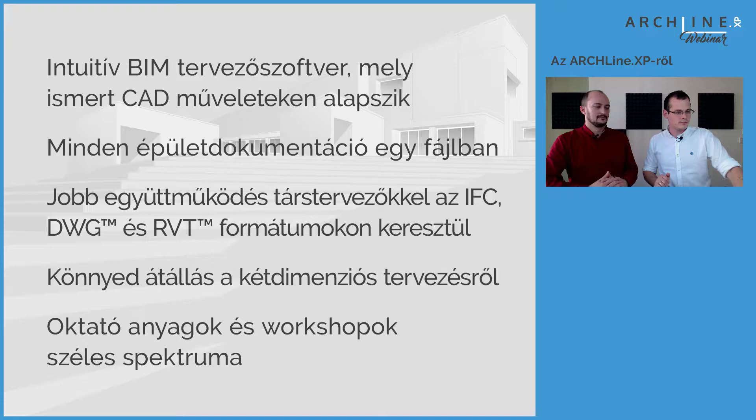Sorry, this is accidentally the Hungarian version. Just give me 1 second to load up the English one. Yeah, it's just a glitch.

Until then, please tell us what we are going to keep on discussing this week. So about this model that we will use, we are very thankful for the designer, and internal parts, roofs, and the flat roof itself, and the structure inside. So this is what we will create today. Perfect, this is what we will start with today.

Yes, meanwhile I have the slides ready. So ARCHLine is actually a BIM design software which is based on CAD tools that you know and already love. It's targeted for 3 main areas: architecture, interior design, and furniture manufacture. Obviously now we are going to focus mostly on architectural tools. This means that everything you would need during a design is in one package. So all the things we are going to discuss today come under the one umbrella of ARCHLine.XP.

And what we are going to show during these discussions is how you can not only create your own design, but how you can collaborate with others using the benefits of BIM. Now, when we talk about BIM, this is a pretty new area, but we are going to talk about that too. What are the file formats, what IFC is, what it does compared to other file formats, and we'll cover all these kinds of details.

Let us give you a teaser of what we are hoping to achieve. Here are a few slides of the renders we are hoping to create by the end of our sessions. As you know, ARCHLine is targeted for creating design and building models, and eventually you can create visuals and rendered images from the software. You can either use the built-in renderer we have, or use a third-party solution.

A couple of thoughts on this. Well, there are other solutions that we will show you at the stage when we talk about visual design, and there will be a pretty exciting one which allows you, if you have a powerful GPU, to utilize the power you have inside. But what we will first focus on is what is inside the package, and that is a built-in renderer with all sorts of material settings, integrated into the project. So whatever you create is in one single file. Even the visuals you can put into that file, and then later, for example a year later, you can just load that up and continue where you left off.

So let's see what we have on the topic today.

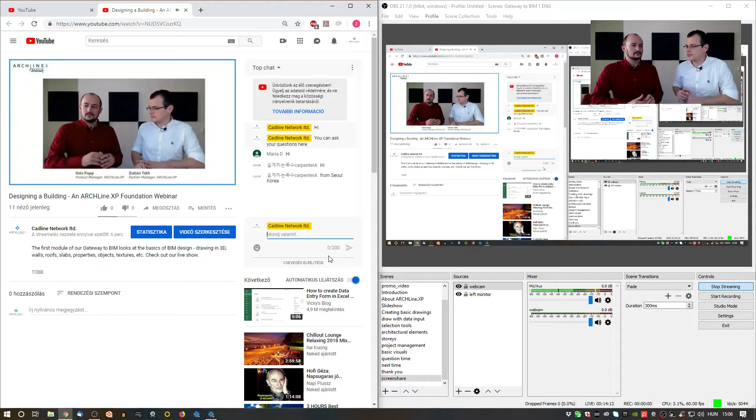Sorry, this is something we have to amend, just give me a second. You just have to share the screen. Okay, let's see how that can be done. Yes, sorry, there's a glitch we have to fight, but that's the charm of the live shows we are doing. A couple of seconds ago you saw how we are broadcasting the show, but that's another topic. So now we are going to talk about... Actually, we have another webinar on that too.

Yeah, so now let's talk about the building itself. As I understand, this is from one of our users. This project was designed a few years back, and it's still an up-to-date model. As you can see, it's finely detailed. I mean, this is still conceptual, but it already features many details that will lead to the end version, which you can see on the right-hand side: the sections, the elevations, the 2D floor plan, and the 3D visuals themselves.

So let's start first with how we can create a floor plan. I will use this as a guide. I have a printed plan, but you don't need to have that - it's just that I don't remember the numbers very well, so I will sometimes look at this paper. But first we will start with the method of how you can draft, how you can create the drawing literally from scratch, from nothing. For that, I will start working with a new project.

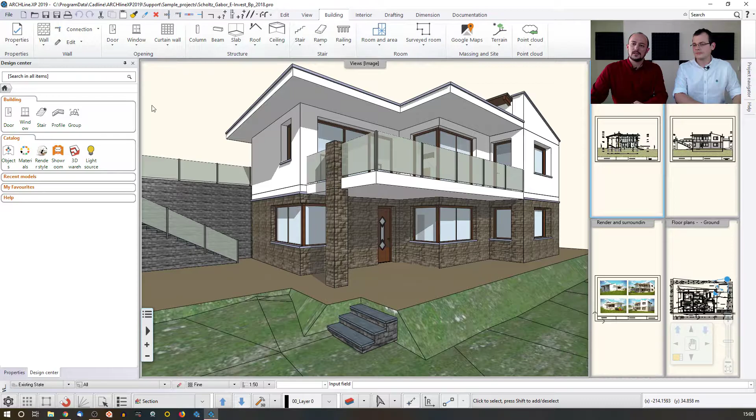I will just go to new project. This is what you will see when you start up ARCHLine, and you can either select any of the recent projects, or click here to switch between the icon list, icon preview, thumbnail view, and list view. In the list view, you can actually filter the content. You can see the history back for a very long time of the files you loaded, with locations, file names, and so on. So if you'd like to find something, like a model we used last time called the Elata Nova project, it filters to that. You can filter by name, and obviously use the date filter to find the most recent version of the project.

You can actually organize this content by default. I believe it's organized like it's on your screen, by date, but you can organize by size, path, and name - it's really up to you how you'd like to represent this list. Actually, the icon thumbnail view always represents the projects one by one with a little preview, in time order, so the top one is the latest, and if we scroll back we can see earlier projects we've worked on.

So now, talking about this, I'm not willing to open up a recent project, so I will click on new project, and when I do that, ARCHLine.XP automatically prepares a project in the default folder, which is under your documents, ARCHLine.XP draw folder. You can actually save anywhere else on your hard disk, and work with a file located anywhere else, but this is the default path. What is a project?

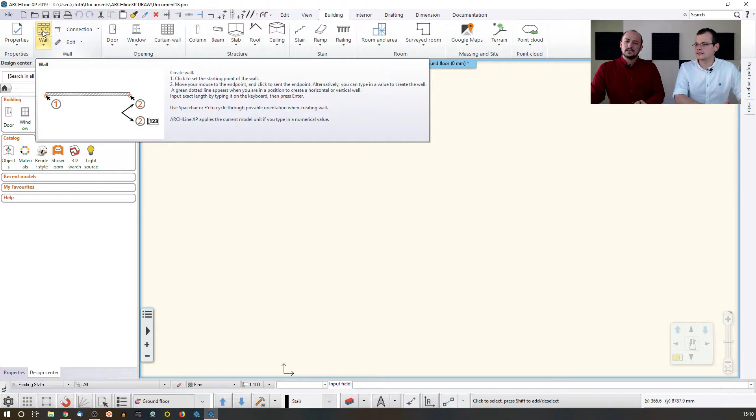So how do we get started? Let's start with the wall tool. Whenever you create anything in ARCHLine, you just find a command, click on it, and the command starts. Sometimes a little menu appears, giving you many other options and tools, but many times it's enough to just click on the main tool to initiate the command.

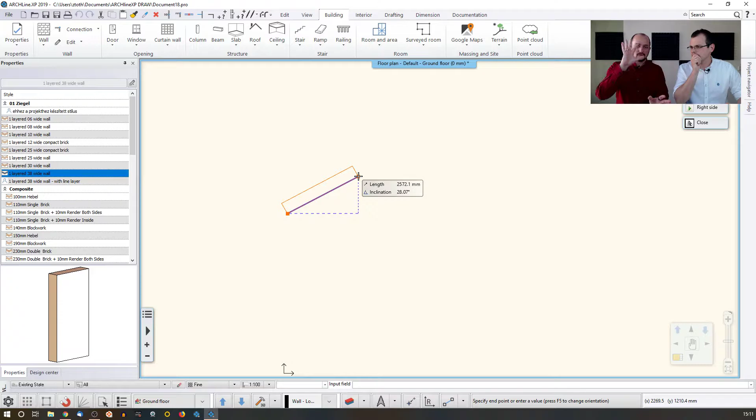When I would like to create a wall, it's a very simple task. You just click once and release the mouse button. You don't click and drag. You click once, move your mouse to the desired direction, and either click now to create the wall itself, or move the mouse, release it, and type a value. Right now I'm actually working in millimeters.

You can see the units at the right bottom corner. So when I move the mouse, type 1500, and hit enter, I will create a vertical wall which is 1500 millimeters long. As you can see, whenever you create something in ARCHLine, it appears automatically in the 2D and in the 3D in parallel. You can also switch between full screen mode and the regular windowed mode.

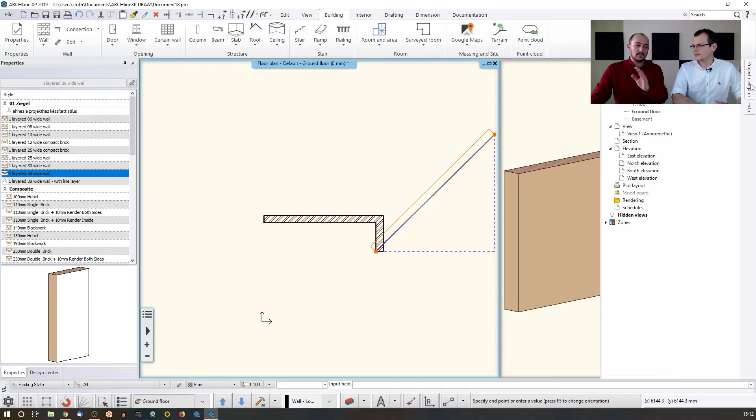There is also a project navigator. By default it's off, but you can turn it back on, snapping it to the right side of the screen. That way you can navigate the software, changing floors, drawings, and so on. I will use the default layout of ARCHLine for now, and sometimes we will get back to this point when it becomes necessary. So this is basically how you work with that.

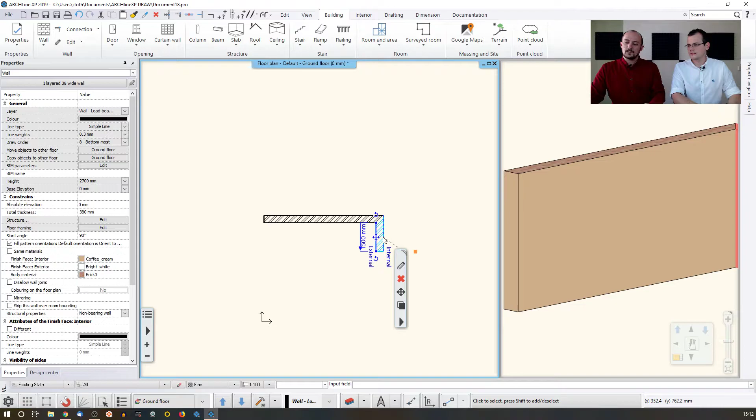Whenever you would like to skip a command, as you can see it's running continuously—most commands do. So if you would like to terminate it, saying this isn't something you want to continue with, just hit escape and start another tool. Whenever you would like to select something, just click on it. If you'd like to select something else, click on that as well. If you'd like to select multiple items, click and drag a selection rectangle, and then, for example, you can erase that. So this is basically how you work.

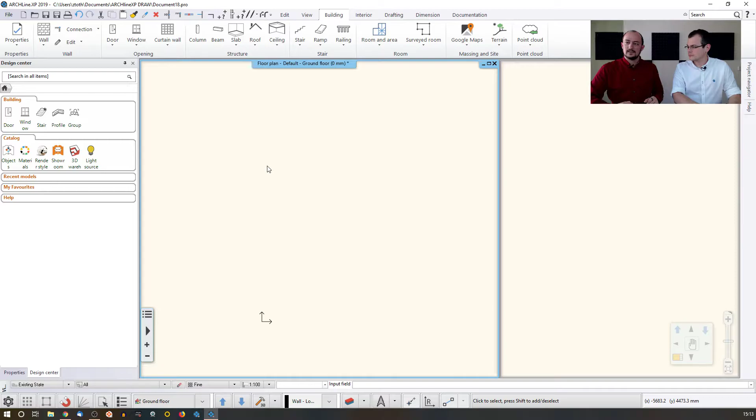Now I'm willing to draft something that will be the initial phase of our drawing. So first I will draft, knowing all these things I've just talked about. I will create the outer contour, the main walls of this building. It's worth noting that I'll work with the default settings for now, but later on we'll realize we'd like a different setting, so we will teach you how to change the settings. For now, we just pick the wall and start drawing.

So I click here, and just as before, I click down and say I would like to create this wall with its external length. So what you are doing now is typing in the exact value. Instead of working with a visual control, you are typing in the exact value. One interesting thing to observe is that whenever you are working with something, you see a bluish line, which is actually the reference line. That's the line you are measuring and positioning, and the wall is added in relation to that line. We'll show later on how to toggle that.

What happens here is that as you proceed, you see green dotted lines, for example, which help you snap to an orthogonal direction.

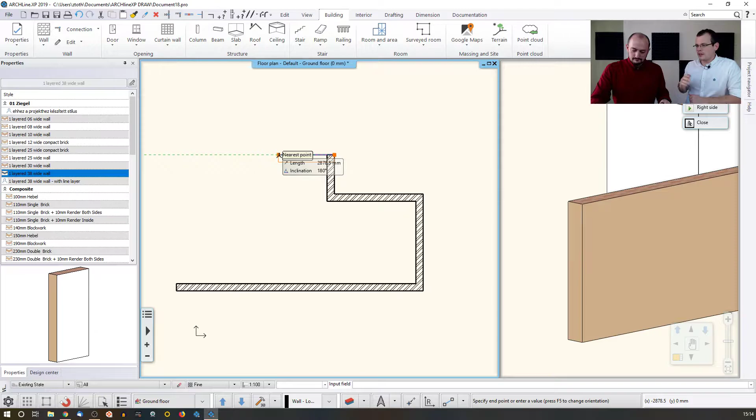Because now we are working in that, we are not working with any slanted directions. We are just going up and sideways.

Now this is an interesting point, because now you could be adding the value, or you can just snap to the bottom left wall corner. And this is where an important question comes up: if I move my mouse to this point, I can snap to this point, but how can I snap to this actually non-existing point?

There are two ways. One of the simplest, depending on how you think of it, is if you move your mouse to the corner point and keep the mouse over there, and then remove it, these green lines appear. These are the guidelines which you can snap to, so it's very easy to find the intersection.

And then there is another way. If I would like to create something with this length, I could still use the same method, or I can just keep holding the shift key, and see, whenever I move my mouse, I'm not clicking - I'm locking the direction so I'm not able to distort it, and then I can also refer to this other point.

So both work. Now I'm just quickly creating something - I see that there's this extra part, an extruding little niche bay in this wall. So how do you add that? Would you draw it as a separate entity, or would you break this wall up into pieces? There are many different ways - I could break this up.

I could also draw it like when I saw it, but this time I simply forgot about it - it's okay. I could erase that and restart it, but there is a neat tool to do that.

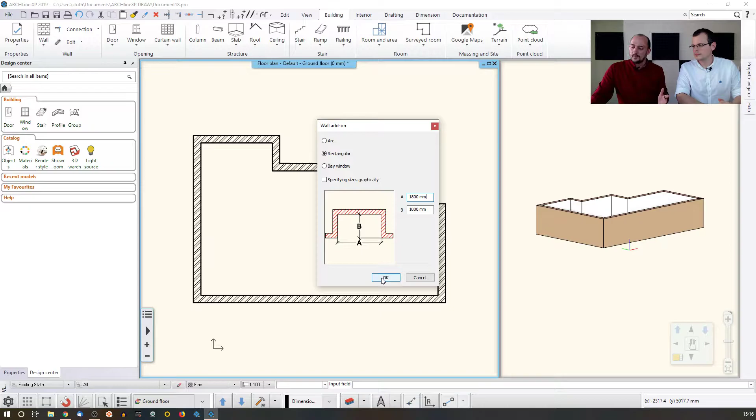So let's say, okay, I'm happy with that. And whenever you see this exclamation mark marker, this usually means that whatever you would like to do now just does not make sense in this specific context. You cannot place this out into thin air, but you can snap it to an existing wall - it cannot stand on its own, you cannot see this happening anyhow else.

Now I know that this little orange corner point that I can see on the screen is exactly 2,300 millimeters from the corner. So instead of trying to find that value, I would not recommend doing that - you just move your mouse to the position wherever you wish, and then you just start typing. Each and every time you would like to use a specific value that you would like to determine, type it always, because that will result in the outcome you would like to create.

So this is how you do that. And this command just keeps running until you say escape, and then we can go on and start working with the details inside.

I see some partition walls here, with various sizes and various thicknesses. Okay, so let's focus a little bit on the details, on how you can set up settings.

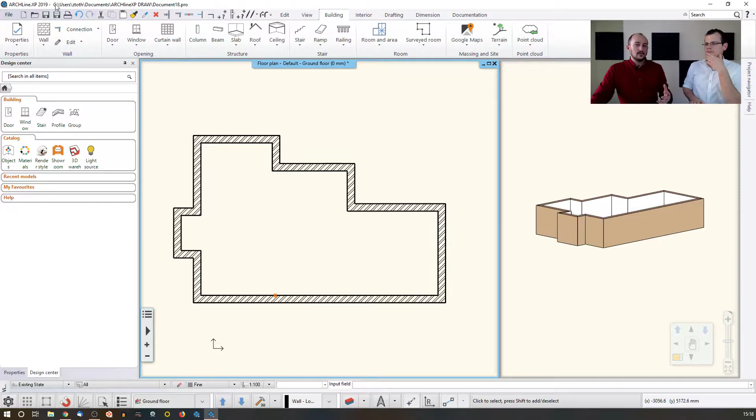Now, just as I mentioned, whenever you work with something, you can work with tiles - some software calls them templates or presets, ARCHLine calls them styles. So if you click on wall, you can see the style list here at the left-hand side. As you can see, the ARCHLine software is shipped with built-in localized content. Now we work with the international English version, but your country's details might be a little bit different, so you will see a similar list to this.

Whatever I select here, now I know that I would like to create a 300 millimeter thick wall. So I just click on this one. It's actually in centimeters, so I click here. And then when I click on the corner point from where I would like to start drafting, then I just use it.

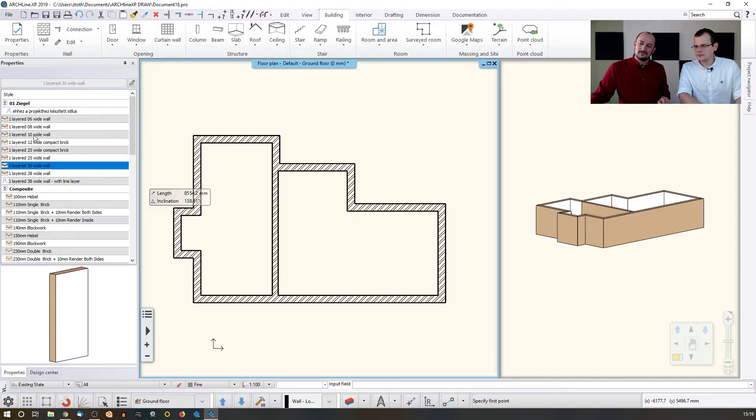There is only this wall here, and then there is another one which should be 100 millimeters wide. So I click here and I start drafting. There is one here, and there is another one here.

And see, now there is a problem with the blue line. Now the blue line, in correspondence with the origin or with the orange part, it should be flipped over. So how to do that?

You can actually go to the right-hand side. There are options appearing. Most of the commands supporting options, those options will always appear at the right-hand side. They are optional, so you don't have to use them, but in case you need them, they are there. So in this case, I just click on the right side, see it's flipped over. I can click on the left side, then it's flipped back, and there is also the center, the middle. So this way you can want it on the other side. I'm clicking on the right side, and then I just click here, and then I just keep drafting.

Now, I don't necessarily need to always work with values. If I just know the shape that I'm about to create, and later I would like to fix the size, that's also fine. So I will focus on this now.

I just know that the shape will be something like this, and there is, again, a wall somewhere here around until this point. Again, using this green, I'm just snapping lines. And then I know that there are 2 walls. I actually know the values, but it's fine to fix that later.

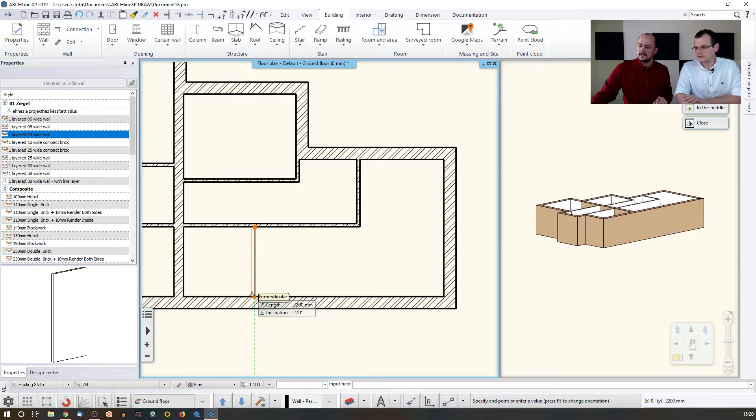So I just simply rough them out, and then now I will show you how to change the relation between the items later on. This is actually something to do with the selection.

Just as I mentioned, when you would like to select something, you just click on that item. If you would like to select something else, you click on that as well. If you select an item and then keep holding the shift key, and then click on another item, this leads to multi-selection, which is different from the rectangular selection, because in that case I'd likely select other walls. This way you can pick specific items one by one, and all of them become the selection.

And the same way you can go back. So now I know that the distance between these 2 walls is exactly 1100, and then I just type it and it fixes that. See, it of course keeps the connections, and the same way I can just fix this here.

So let's just move this. This will be, I believe, 2350, and there's another one here, and this is actually 2100. And so on, keep going. This is how you can later refresh or update the content.

Wherever you move the items, as long as they are not in a geometrically impossible situation, they will be kept in connection, as you can see on the screen.

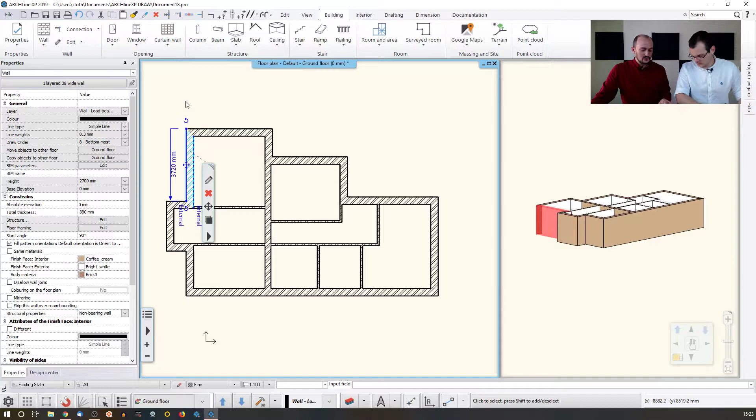For example, I know that this wall is not correct now, because I just realized that I started working with 380 wide millimeter walls, but actually what I'm willing to create is 440 in thickness. So how to do that?

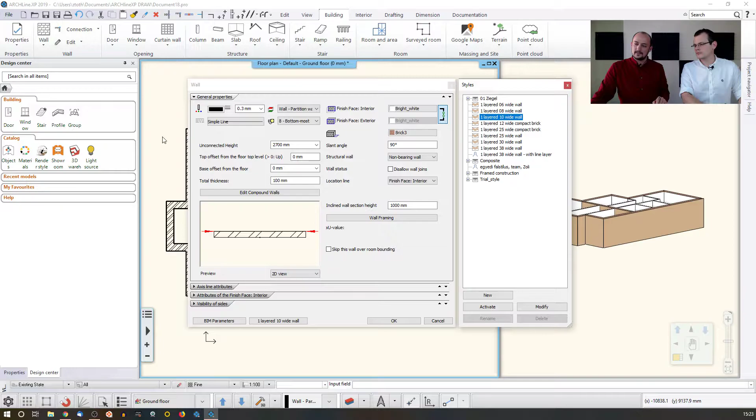Let's go back to the settings, wall and wall settings. Let's use this as an initial setting, because otherwise it's okay. The material, the height is fine, so I just use that. I load up the styles list from within the dialog, and I double click on this wall, and it loads the settings, and then I can change them to wherever I want. I mean, this should be the setting.

You can even set up the layer settings, priority order, and so on. So let's say I'm fine with that, and even without saving it into a style, it's very important to know you don't have to save them into a style. You can just click OK and start working with it. Let me just show you that. If you just click there, now I'm working with a thicker wall.

But to be able to go back, let's just find this one. To be able to save it, you just need to click here, and say that, okay, this is a new style, and this style will be, again, simple 440 millimeter wide load bearing, and so on.

So you can keep the name according to your standards. You can set up a folder, as you can see. This is a composite folder. There's a framed construction folder, and so on. You can even create a subfolder, and decide what happens with this style.

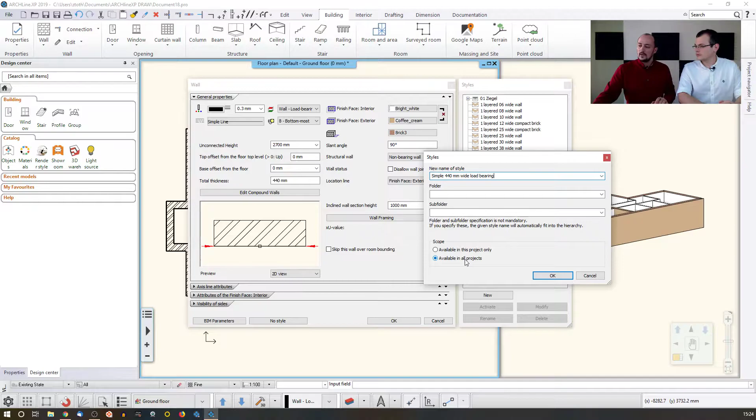Now, a style, when you create it, can be visible all through other projects on this computer, or you can make it private to this one. So this is the project only setting. I will keep it as a public style for all the projects, so I will just go with the default. Let's just go with okay, now I can see the name appearing here. So from now on, whenever I create a new wall, I will create that wall with that specific setting.

Now that's fine, but I actually would like to change this existing wall into the latest created settings. So for that, I can actually select these items. Is there an easier way? Yeah, select all actually. There is a much better way instead of just simply going through and selecting them one by one.

There is a selection tool which is actually appearing in two places in the software. One is at the bottom. You can click here, and you can see there is a by properties option. By properties allows you to select a criteria, like in this case, this will be the wall width, and if the wall width equals to a specific value that I determine here, I think it should be 380. Sorry, yeah, that's right, you're right.

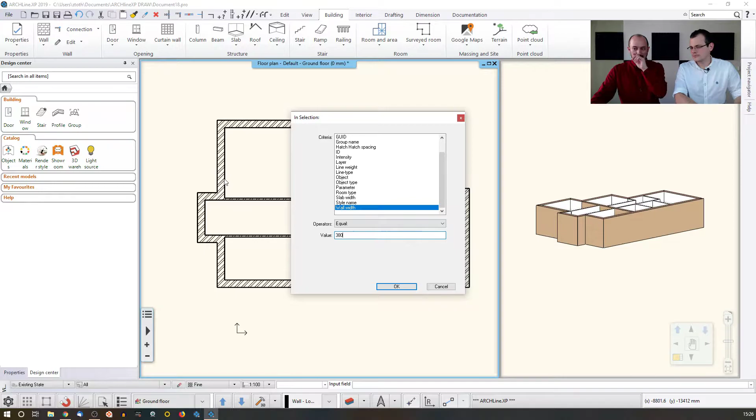Because that's what I'm willing to do, and now I only have these, so I just select this and click OK. So now the software selects all walls with the same thickness, and then now I can just click here, select the correct style, which is simple 440 millimeter. So now it makes changes, and in some places, as you can see, I might need to fine tweak what happens here, like just move this item with the movement marker, move from this point to this point. That's how you can override the settings in the project that you're working on.

How about other editing tools? For example, if I want to add a slab to this. Yeah, how do I do that? First things first, let's see how you can handle the content.

Now, as you could see, I'm zooming in by scrolling up. I will zoom out by scrolling down. Each and every time when I zoom in, the focus, the center of zoom, is where I keep my mouse, so I'm not just holding it here. This is how you can fine tune whatever you zoom. You can actually keep holding the mouse wheel and moving the mouse. This is panning, and this works all around, in the 3D and in the 2D, and zoom in and out works the same way.

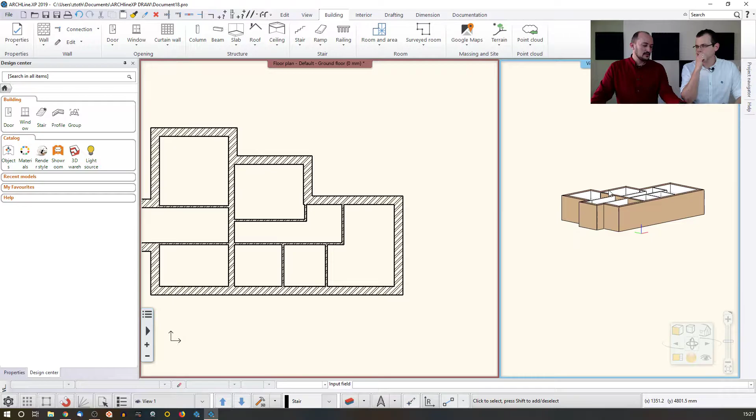Now the difference here is that in the 3D you can actually rotate the model, you can orbit around the model, and this can be done by just simply holding down the shift key and the mouse wheel and then rotating. So this way, now we can actually clearly see that we don't have any supporting slab or ceiling or anything like that.

So I will just quickly create that. I go back here and use the slab tool. The slab tool comes with the default setting that we currently have, and then I can start deciding whatever I would like to use.

The slab in sketch mode is something we will use later today. So I will go with the slab by walls. This is the simplest, because I only need to select the whole building, hit enter, and the software will recognize its outer contour and automatically create a slab like this. Good, I think we don't have any openings yet.

So how do we add them? Well, let's start with the doors. They work in a similar fashion. When you open the door or window dialog, you will see built-in settings - you can go with a flush door, a double glass door, or any of these, or you can go with the library settings using this command, and then place it.

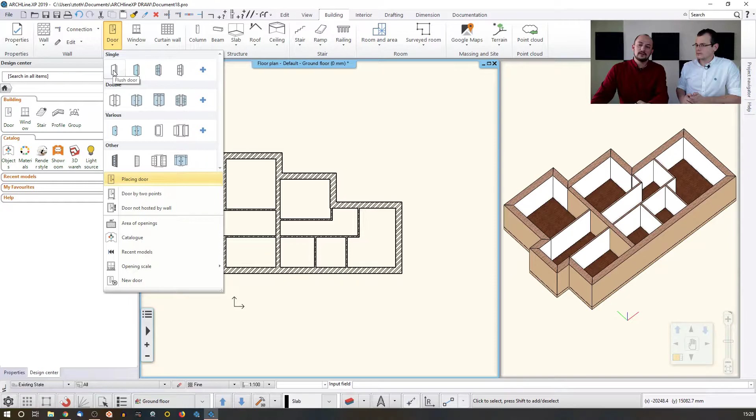So I'll go with a single flush door, and I'll show you how it generally works. Whenever you see this exclamation mark, it means you cannot just put this door freely. There's actually a specific tool for that if you want. But normally this should be part of a wall, so it only works when you're hovering your mouse over a wall.

So you can click here, set up the opening direction, then click on another place, and as you can see, on the left-hand side there are predefined styles which you can extend with your own settings. So now I will work with the 900 millimeter wide door in a partition wall.

As you can see, there is this orange dot now on the screen. It appears on the right-hand side of this door, and this means this is the reference point.

The same way I could set up the distance of this reference point from the same-side corner point - I could just type 1500 and hit enter, and now the software places it. How do you move the reference point to another point?

Let's say I would like to place this door with its own center point into the center, the half division point, of this wall. I can easily find the half division point, but the problem is it will place the left side. So if I'd like to change the reference point, I use the right-hand side options - next reference point - hover my mouse back, and I can see the orange symbol is grabbed with its center, then align that and select it.

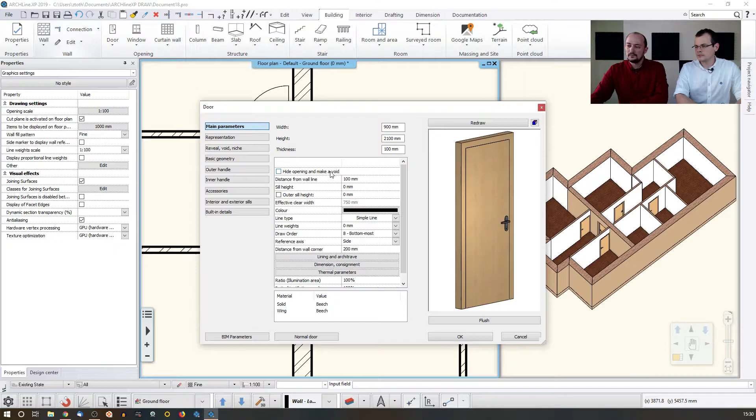If you would like to find a hole, you will find built-in holes that you can use as doors or windows. But if you would like to turn an existing one into an opening, you just select that and go to the properties, and in the properties dialog you will find 'hide opening and make a void'. This is literally turning it into a cut in the wall.

And okay, now I have this opening. How do you modify the size, as you can see? It should be a bit wider, I think.

Anytime you select a door, you just click on its symbol and it's selected. Now in case of a hole, it's a bit more tricky because you need to click on its side, since there's nothing to click here. So you just click here, and the software either finds it automatically or finds something else at the same click point - and yes, at this point there is the wall as well.

So if that happens, and as your project grows in detail, this will happen from time to time. You will be able to select that specific item, and the software will automatically create the jump list.

Now let's talk about these markers. They mark the situation, the value, the corner point, or something that appears right away here. For example, here you can see the height and the width, and you can see whether it's the left or right hand side of this door. Also, if you click on the corner point, you can see the change size option.

You can just resize it. Click on the new position. And again, if I wanted to, I could just type a value as well. So this way you can make it larger.

And let's just make a few windows, because what are the particularities of adding a window? How are they different? Well, one of the differences is that they likely have a parapet or a sill height, as you can see here, and sometimes they are not just freestanding windows anywhere in the center.

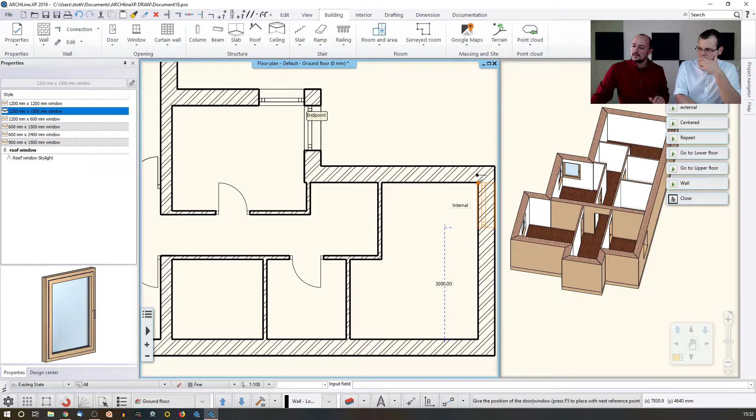I can use the next reference point tool and just click on the center point and so on. So this way is rather similar to the previous solution, but there is one specialty, I believe, to these, and those are the corner windows.

Sometimes you would like to create a corner window, something similar to what you can see here, but without the wall here. I just would like to see the windows touching each other with the column, perhaps making them join together. So there is a tool here called window.

It's actually here, I cannot see it with my eyes. It's the join two openings on wall corner tool. So you need to select one of them and the other one, and then it's joining.

And if you start the same tool in 2D, it works actually the same way. So you just go here, and now the windows actually retain their sizes. You can decide you want to do it some other way, but this is one way to do it. Actually, we did a webinar on doors and windows a few weeks ago that would show you the essentials.

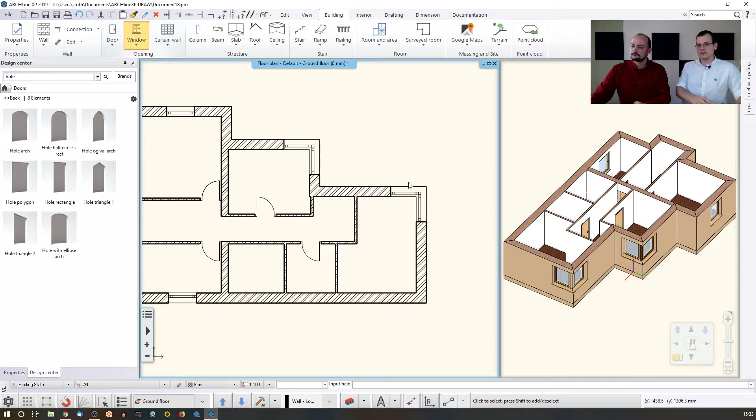One thing I just want to add here is how these doors and windows are getting into the software, so what are the sources? Just to mention a few: there is the built-in library, of course, which you can fine tweak.

You can go into the details of any of the doors and windows, and you will find this basic geometry page, and here you can just tweak them. You can also use the new door, new window command to literally create something. We have this topic of how you can turn an object into a door and window and use them.

Download from bimobject.com, Google 3D Warehouse, and use it as an asset for a door or a window. Use whichever source is best for you.

How do we turn this into a multi-level, multi-story building? Well, before I do that, there was one thing I wanted to show you about the slab. If you click on the slab, as you can see, there is a bunch of lines and dots appearing. These are also markers.

With those, you can actually literally stretch the content at any time. What I did here, I click here and select offset, which is parallel shifting. I click here and then I click here. I just remove this node, like a pin. So now it's merged, the two edges, and then I can just move this here and further extend it.

So you can flexibly edit all items in ARCHLine. So this is what happened. Now let's talk about the floor and the level management system.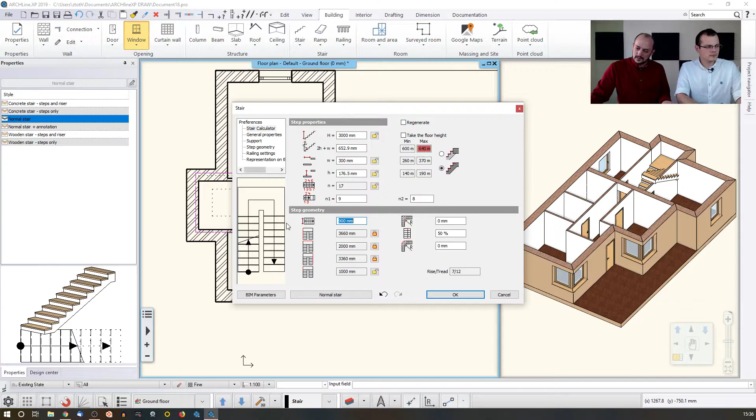If I would like to keep it, it's fine, but actually I would like to change the whole width of this whole staircase, from here to here. There's a little figure here showing this is locked, and that's why I cannot just change this value. If I unlock this value, then I can type the correct value, and again wait a little bit, and I can see it appears correctly. So I click OK, and then I have this here.

Another thing you will likely want to create for a staircase is a railing. There are many ways to create a railing, but for a staircase it's simplest to go to the railing settings and select on which side you would like to place it. If you walk up the stair, it's on the right-hand side, so I just click here, and then I select any of these styles the software ships with, or which I created. There are a few appearing here, so let me just go with this one. With this one, when I click OK, the software automatically drafts that for me.

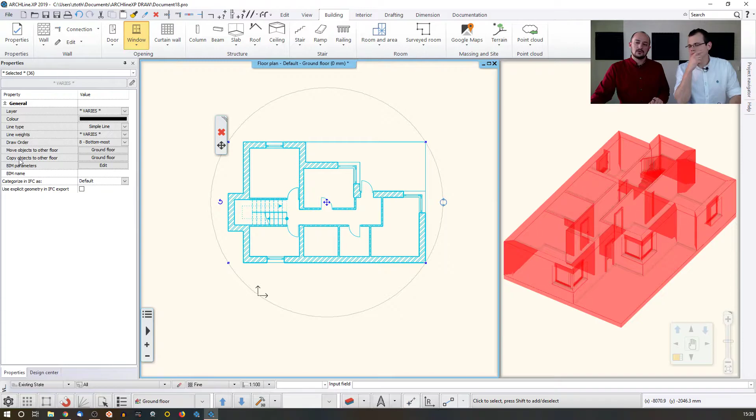So now we're done with this floor. What I will do is select the whole content. I just click here, move my mouse to the right, click and drag, and click again, so I've selected everything in the 2D and in the 3D. Now at the left-hand side there's an option appearing called Copy Objects to Other Floor. If I click here, I can select another floor, which is now the first floor. The software will make an exact copy of this floor, and then I can start customizing.

For example, somehow the layout is different. There's no wall like this. This is also missing, and this as well.

How do I know which floor I'm currently on? Well, it appears in at least 2 or 3 places around the interface. One is at the top, which tells me I'm at the first floor of this building. The other part is here, where I can see I'm on the first floor. I can use this as a jump list to go back to the ground floor, or even use these arrows to go up and down, like flipping a page of a book. There's also a shortcut for that: Page Up and Page Down, so you can flip between the floors.

Now I have a double of the stair as well, and I don't want that, I don't even want the railing. I just remove that. In case of a stair—sorry, I'm on the wrong floor now. So I just undo with Control Z, and that's the same thing here. I go up by pushing the Page Up button, and I can see it appearing on the first floor.

So now on the first floor, I just select this item and remove that. Then I'd like to make some adjustments because this is not how I want to see this stair. I just go to the settings, and then I go to the general properties.

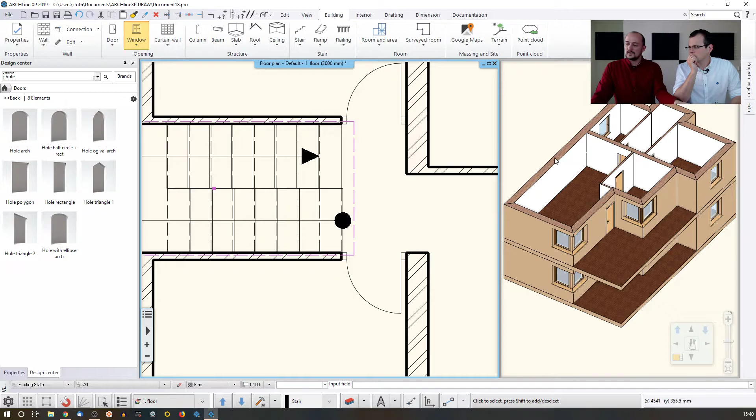So why does this happen? Let me just remove that. It's because here there will be an opening. There is no opening yet, but there will be one, and from the opening I can see this as a top view.

So let me just go back to the ground floor. How do you create an opening above to make a cut into a slab?

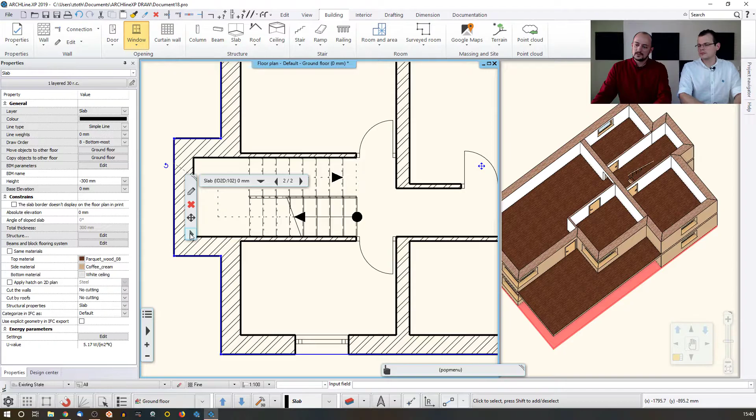You can at any time select the slab, use the local menu, and use the hole command. I'm actually working on the bottommost element and I don't want to cut a hole into that, but I just want to show you that this is one way of doing it.

The easiest and most convenient way with this specific staircase is to select it and instruct the software to cut the slabs above the stair. This is the fastest method. The software will automatically cut the slab above the staircase, and you can select the whole slab and see the cut. If you'd like to modify it, you can simply modify its contour, make changes, and you'll see the result.

Perfect. How about adding some roof elements, maybe? Well, the roof is another topic which we will cover when I open the following version of this project. But before we do that, let's talk a little more about the floor system.

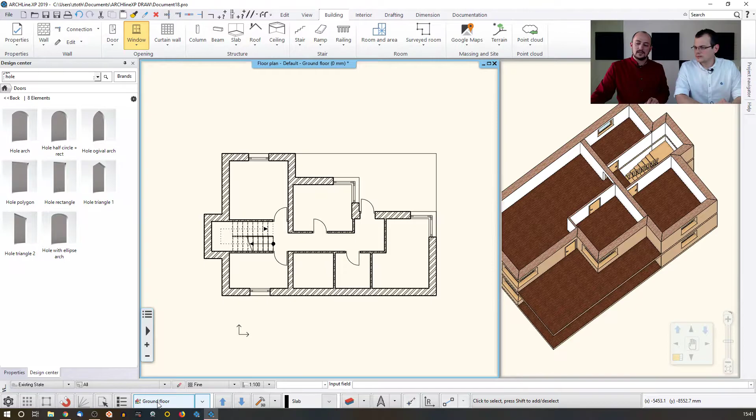Oh yes, the floor management. There's one thing I would like to really show you, and that's it, that's how to manage those. When you click here, you can see the default floor list. You can add above, below, you can remove, rename by double clicking on it, change their heights, and change variables here.

Now, by default, as you can see, I'm not touching anything, I'm just using the values as they are because of these settings, because of how the software handles this content. Whenever I go back here and say we went to the site and decided to make the ground floor 300mm larger, I just edit the ground floor height, say it should be 300mm taller, and click OK. Now the software makes the adjustment on the floor and in the 3D automatically.

So we didn't see that happening, but as you can see, the distance between this window and this part is larger now. Maybe if you undid it, then you would see it.

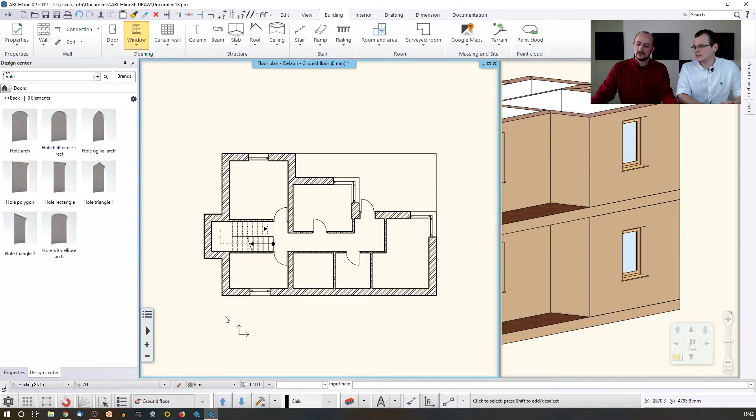Well, not in this case, because this was a floor setting, but let me just reverse it. I'll go back here and change it back to 0, click OK, and now we can see it jumping back. So the point here is that if you go back to your design and make changes, the components will comply with the changes automatically.

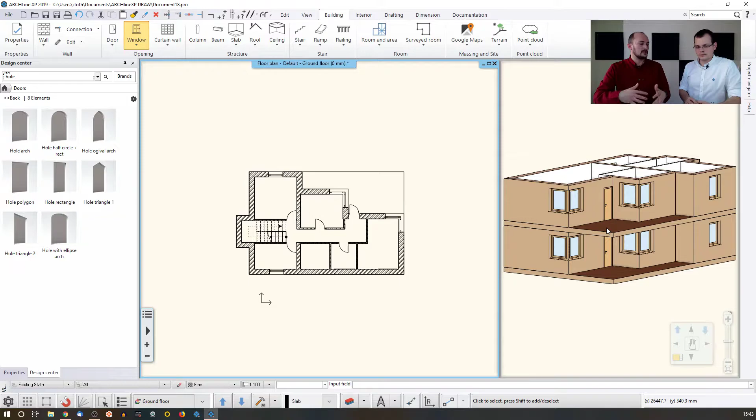Because if this wouldn't happen, then in classical approaches with other software, what you'd have to do is modify the existing items, the properties of them, and that's not what you want to do. You just want to make the changes, and then you want the software to recognize that this is a situation when this should be changed. That's what ARCHLine.XP will do for you.

That's right. So let me load the following stage of this project, with the slabs and the roof, and perhaps a railing on the balcony and railings.

So to focus on that and show you what happens here, we already have a few items. This is what I'm willing to create. There's another version of this project, I believe, without these items. Let me just go here. There is actually, unfortunately, I overwritten this, so let's click cancel. We can just delete and remove these, and I will show you how to create those. Let's just remove this and this.

So the interesting part here is that there are two kinds of roofs that you want to create. One is a flat roof, and the other one is a slanted one. What are the differences, and how would you go about doing this? This is how it looked before I started working with this one, and I was on the ground floor.

So I just jump back to the first floor, and I can make it to the top floor. This is the roof floor. So here I would like to create a flat roof with a slab, and for that I would like to see the content which is below.

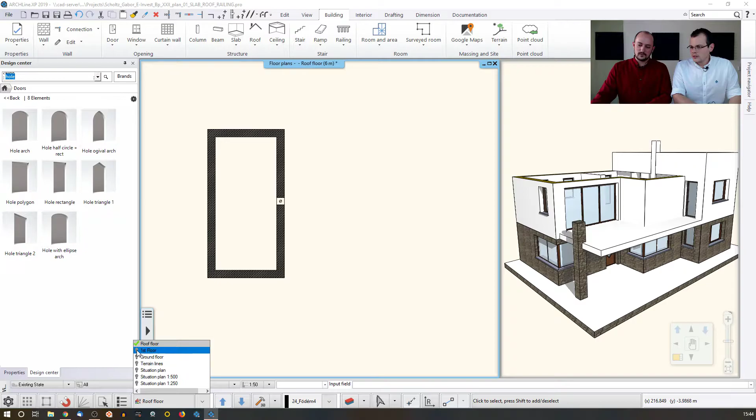You can't right now. So I go here, and I click on the first floor's visibility icon, and then I click here, so it becomes visible. So now I can refer to that.

So when I start using the slab tool, slab in sketch mode, this is where I would like to use that. I just trace the contour of this wall or this layout below your level. Yeah, and now I'm done, so I just hit enter. The software will create a closed loop, as you can see here.

And then, just as you could see it before with other tools, you can use the offset tools, for example, to make it larger. You can use this regular offset to, or you could even be adding some new nodes and use them to break it apart, or you can again use values here, so you can just type a value for how you would like to shift it. So you can literally just create that.

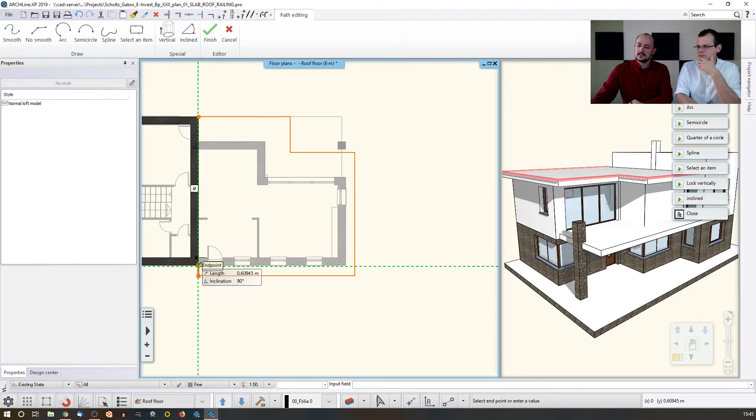And there is also another tool which is called the sweep tool. This comes with this specific option which allows you to follow a contour, and I'm working in 2D, but as you can see it appears automatically in the 3D as well. So using this setting you can actually create something that will be kind of a decoration item in this case, but you can use it for many other purposes.

It's a very simple thing. It's like a swept profile along the path, and now the profile itself is a rectangular profile, and the path is the red one that I just drafted.

And if I would like to change the cross section, I go to this setting and let me just go with a simple rectangular one. So I go here and I select rectangle. Let's just find rectangle, I don't remember where it is, so I just go to the home and you will find it, I type rectangle. Rectangle, and there are plenty, but I just would like to go with the simplest one, this one.

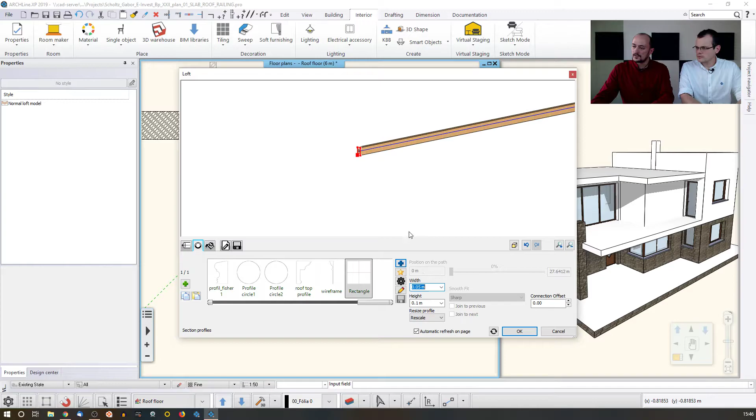And then I can just, you know, resize it. Let's say the width is around 5 centimeters and the height is around 10 or so. And I can also change the material properties to gray. When I'm done, it appears.

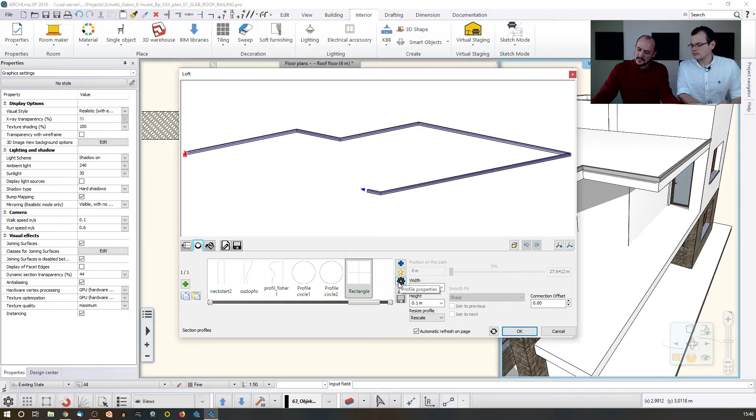And if I'm not satisfied with the positioning or any of those settings, I can change that. Let me just show you one glimpse of that. For example, now it's aligned with its own center point, and I'm not happy with that. So I go to the properties, I go to the settings, and I find the cross-section profile. And in the cross-section profile, there is always this little edit profile option. And here is the trick, this is why it's aligned with its center point.

I would like to align it with its top left corner, for example. Let's just check whether I would like to, no, it's actually on the other side. So I just go here and see from here, I move to this one. I click there, okay, so now it jumps outside of this blue line. And then I say okay, so now I'm done with that, and this is how. So there's one solution to add some decoration profiles or anything like that.

But what happens with the other roof part that you see behind the chimney? How do you add that? Well, now I will create this with a real roof, and this is in the building roof tools.

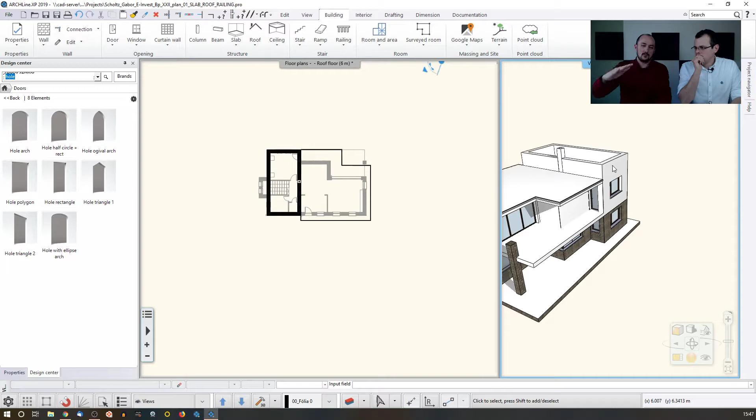Now, before I do that, let me just show you another example, because this will be only one pitch, actually only one plane. But when you make a little bit more complex roof than that, you will see that there are built-in roof shapes, like the open gable, the jerkinhead, gambrel, and so on. So whenever you go with any of those, the software allows you to draft on top of an existing item, and it will create it, and you can fine tune the settings, how it looks like.

But let's just erase that and show how the other option goes. So I just go to the roof, and there is the roof plane by reference line, and this allows me to draft the outer contour of this roof. And by the way, see, I'm just making a mistake here.

What do you do then? I can undo when I'm drafting it, and then fine tweak it. Later on, of course, I can change the contour by clicking on it, but it's easier to get it right on the first try. So if you ever make a mistake while sketching, you don't have to terminate the whole command, you just go back.

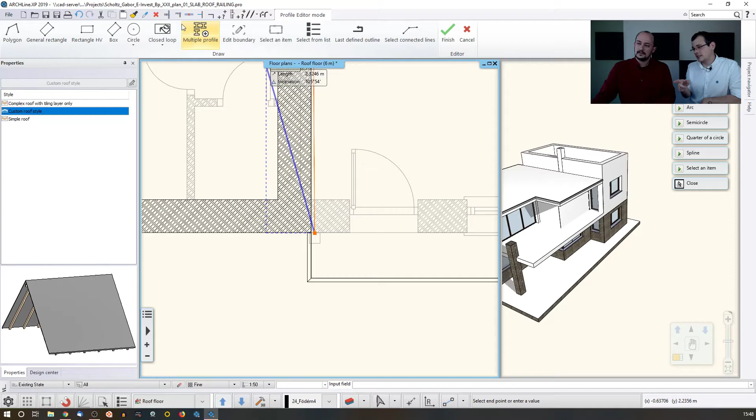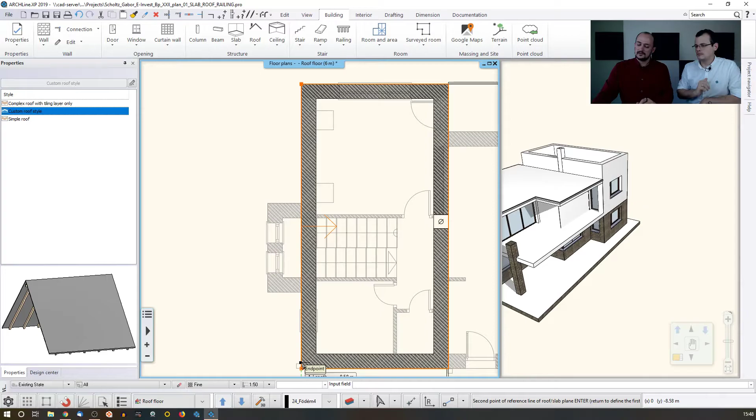Now the drawing is quite dense already, so I need to keep my eyes on what I select. I just click here, and then I think I'm done. Now I just need to click on one of the corner points, and see there is this little arrow indicating the elevation direction of where the pitch goes. I use a value of perhaps 15 or 20 degrees, and then there is this height, which is also measured from the zero of this level, so this will be too high.

I would like to show you how that goes. If I click OK, see, now it's floating in midair, and that's because of that setting. So you have at least two options.

Each time when you have something on your drawing and you select it, you can change the properties of a wall, a roof, or whatever you'd like to change, here on the left hand side. For example, there's this base offset from the floor. This is the value that I'm willing to change. Let me just change that to 1,500.

Now, actually, I just changed the value. I'm working already in meters. So if I like that, I keep that.

Or, in case of roofs, I use this many times. I just select the roof in the 3D, and if it's not the final version, just a conceptual drawing, then you can fine tweak it later, but conceptually it's already okay.

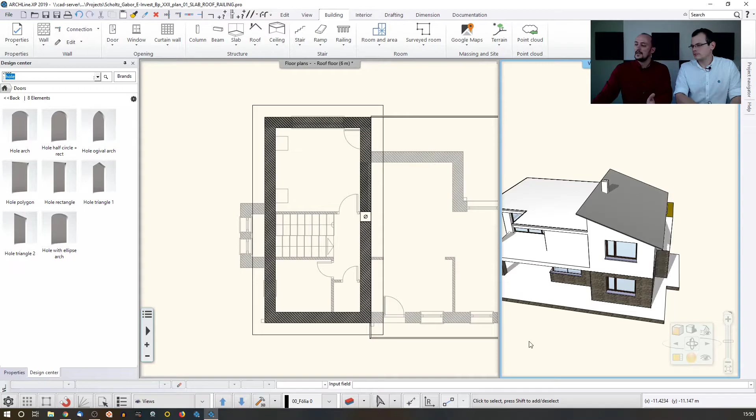Now when this happens, at this stage it's normal because the software did not update the 3D yet, but I can instruct it manually to rebuild the 3D, and then it will automatically cut the model. What about that extension over there?

Let me just show you that as well. It's just again using the same insert node and offset the content, so it really depends on what I select. Insert it here, insert another one here, and so on. So I can draft it, and then again, if I click on the 3D hammer to rebuild the model, it's updated.

You mentioned something about railings. We already added them to the staircase. So what else can we show? About the railings, if you'd like to create a railing here around where there's no stair, then you can use the railing drafting tool.

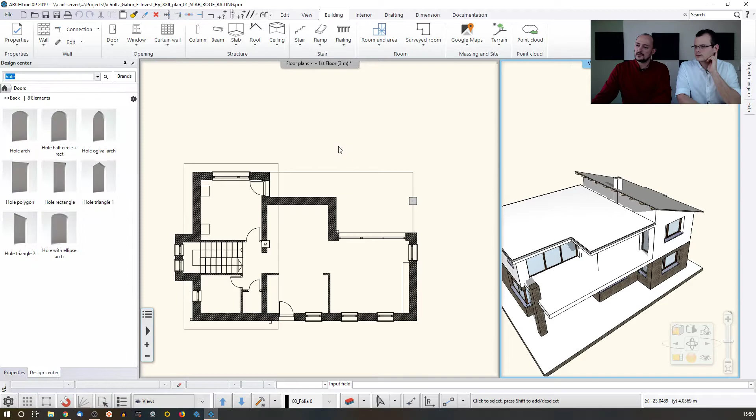You can just go—I'm actually in the 2D now. By the way, you could have done this in the 3D as well, but if we do it in the 2D, you can see it better.

So again, I can go with the built-in settings of any of those. I just go with the default one, and then I click on the corner points, hit enter, and then enter again because I don't want to change the height, and I just keep going, and then I have these two. Now, how do you fine-tune this, because there seem to be too many?

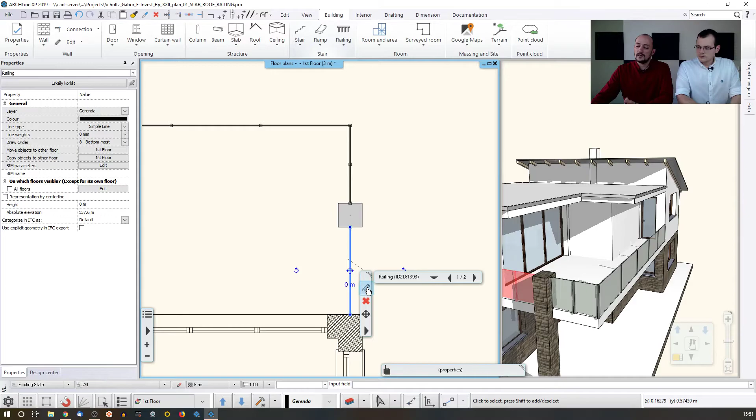We actually have a way more detailed webinar about how to change the staircase and railings, but just a quick glimpse here. Whenever you select an item and go to the properties, in case of railing as well, you will find all the necessary settings that you can fine tweak.

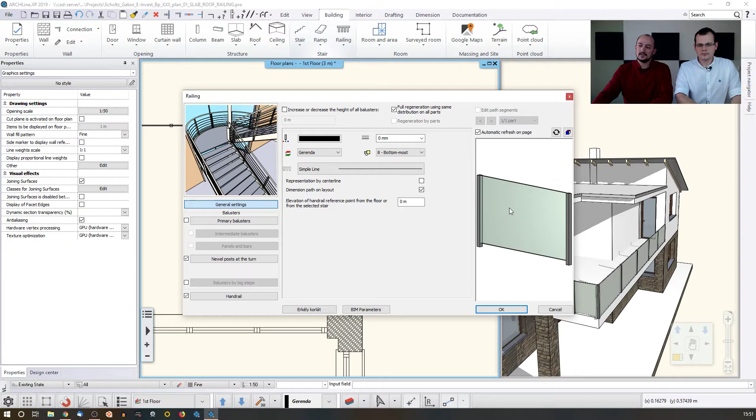For example, this specific item—when you go through it, you'll find this is the baluster by big step. If you enable or disable, you can change that setting. You can even change whatever you'd like to see, a little standing post or something like that. You can just fine tune everything here, say OK, and then it happens.

In case of a more complex solution like this one, I just use the F2 key to magnify the content, which is actually the same as this one. When you click here, you can see these little markers appearing in case of components. These are the components. You just click here, and you have the same options. You just disable that, and see it didn't change the rest of the settings of this little railing around.

Without spoiling too much what we are going to talk about in the last episode of this series, let's talk about visualization. What are the outputs that you can get from this drawing?

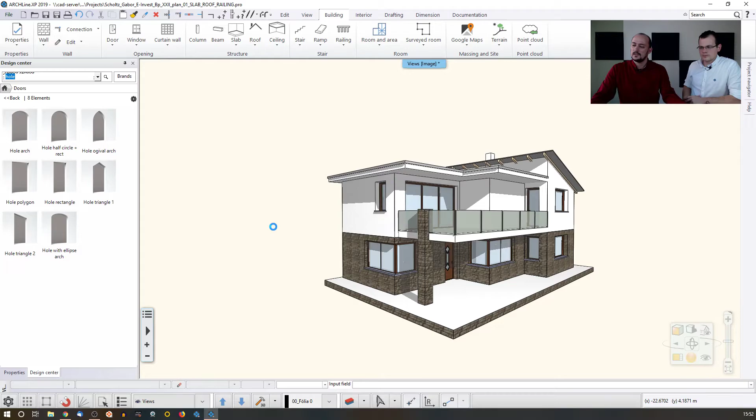Let me open the final version, or semi-final version, of this model. This represents the building itself, already done, with some surrounding around it. We will discuss the surrounding in a following session. Sorry, I loaded the final version - let me open this one instead, quit without saving. This represents the same building, just without the other content.

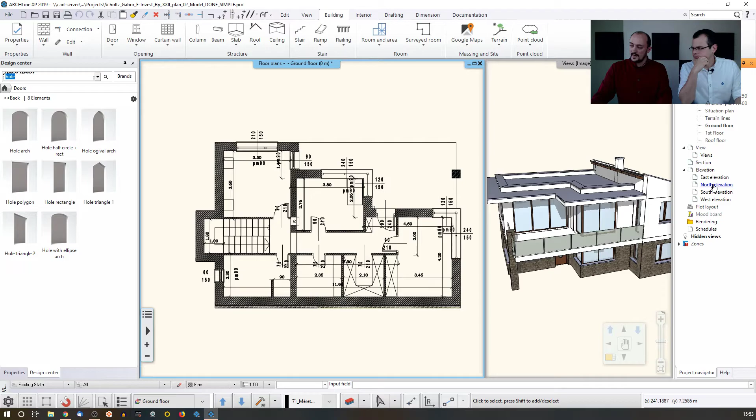If I would like to create an elevation of that, it's in the project navigator. I just enable that, and there you can see the elevations. North, south, and west are something you can create when you click on it. So let me just create a north elevation, for example. The software will automatically represent it, and then you can fine tune it.

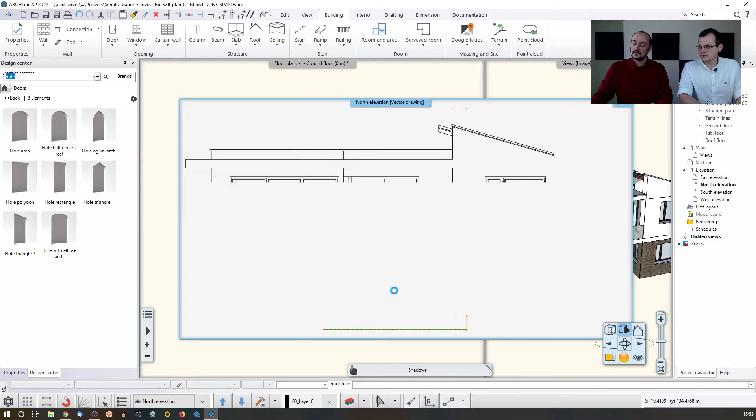You can go to the settings and add some shading. Let's say I would like to see the shadow contour with hatches and lines, shaded with texture, and an elevation shadow. When I hit OK, the software calculates this result, and then I can go into the settings and change the material settings to make this look different if I want to.

But let's talk about this when we create the section. The section is rather similar. For a section, I go to the documentation and select the section tool. This section tool has a few options, and I would like to create a regular section now, so I go with the first option and the default settings.

The only thing I change here, because I'm creating an architectural section, is that I would like to create the hatch on the section. I click OK, and then I just draft the line. Let's go through this here - two clicks, and the third one too, and set the direction. The software creates that section.

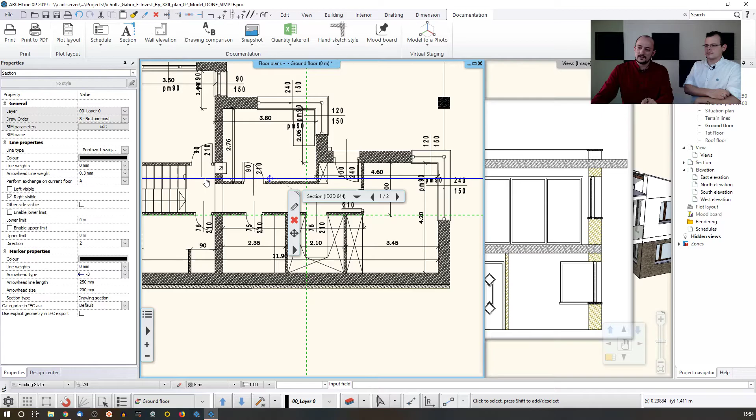It's not detailed yet, we will talk about that later, but as you can see, it automatically intersects the building. If you make changes, like for example I wanted to make a break here, I just break the line into two parts, click on the right-hand side, offset it to the center of this corridor, enter, and update the section - then it changes a little bit, as you can see there is this break line here.

Now, before we talk about how to get this all together, let's talk about 3D representations, because there's a very interesting thing we see right now. So far we were in an axonometric view, but now we are in perspective. What gives? To switch between the two, you can use this little navigation bar.

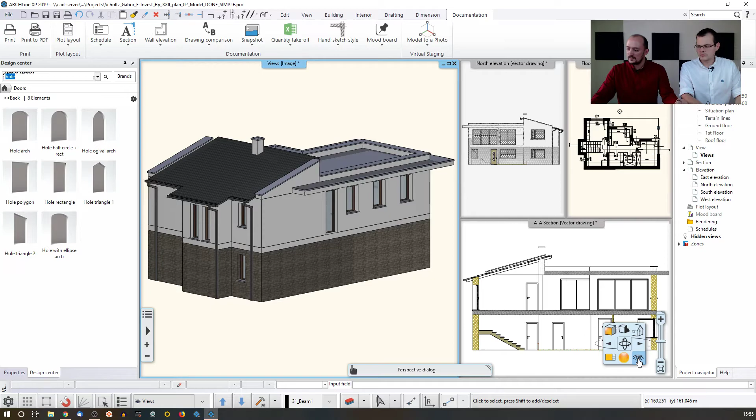Here at the right-hand side, you can find the regular views like the classic right view, top view, and so on, and the axonometric view. If you would like to go to the real perspective view, you need to click on the little eye here, and that will bring you into a specific 3D view wherever you left off.

You can move this. By default, it will appear near the building - I just edited it in the wrong way now, so it appears here. You can also go to the side views, like the right view, and see this building is actually floating very high in the air, because we already determined some of the beam settings, which we will cover later - that's the elevation above sea level.

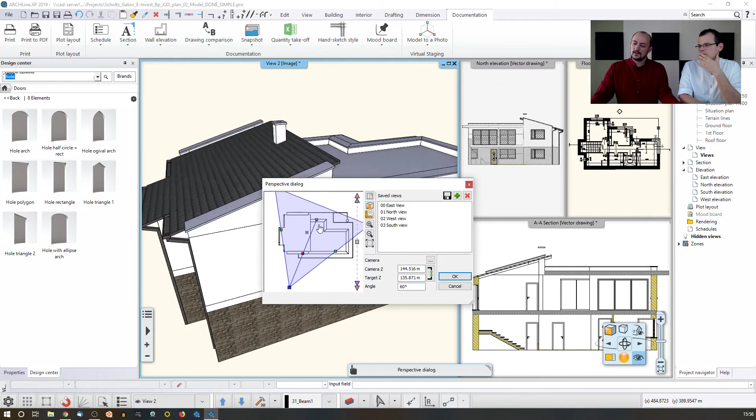So now you can set up a view. Whenever you click here, all you need to select is the top view where you would like to look at and where you are in the 3D space, and hit OK. Then you can fine tune it using shift and the mouse wheel, holding that down.

Can we perhaps create a cutaway so we can look at it like it was a dollhouse or something? Yeah, for that you can use the section - there is this define section tool to cut away the whole building, but it works in 2D only. That's not what I wanted to show, I wanted to see this thing.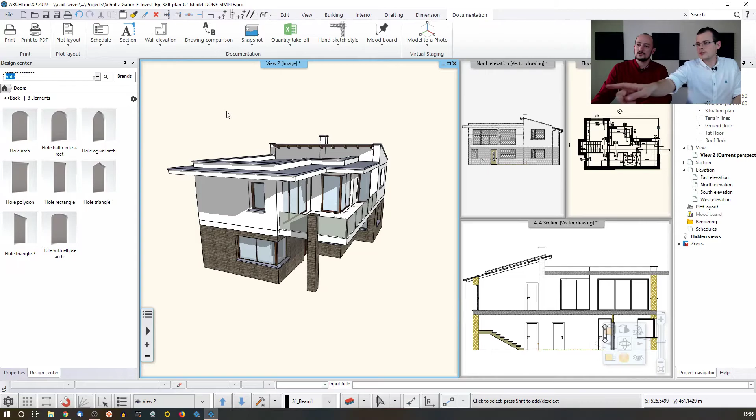Yeah, so this one, right? Yes. When you click on that, you can actually say that you would like to literally draft a contour around and cut this halfway. Let me just go back - I think it's in axonometric, I think this is it. Well, sorry for that.

So I just go to the axonometric view, for example the front view. So I just cut it half. I go to the section and the 3D model section, and then I just draft something like that.

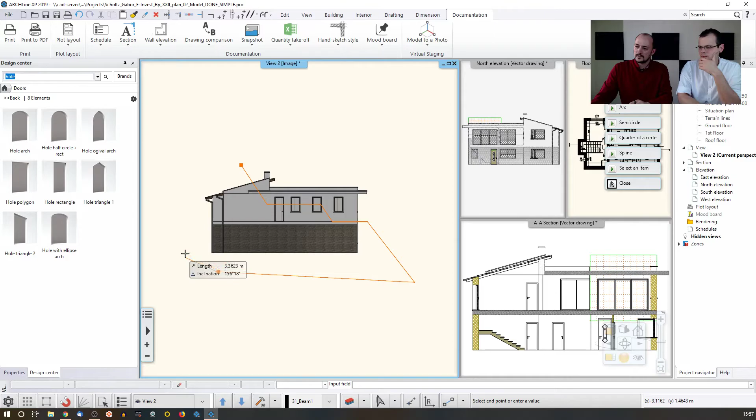When I hit enter, I just click on the inside to keep that. This is just a temporary change, and then it looks like that. You can use this for renders, for all sorts of representation. But whenever you go back to the 2D and rebuild the 3D, the software will get back to the original result.

One last thing I think we should show is how to get one of these drawings you created into a PDF document. So how do you push that into an external format?

For that, let me just go back to the 2D here. As we already have a few details here, let me quickly show you one specific thing before I prepare the layout, and that's about dimensions. I can use the building dimension, walls dimension, or the all walls dimension, and then select options that I would like to represent here.

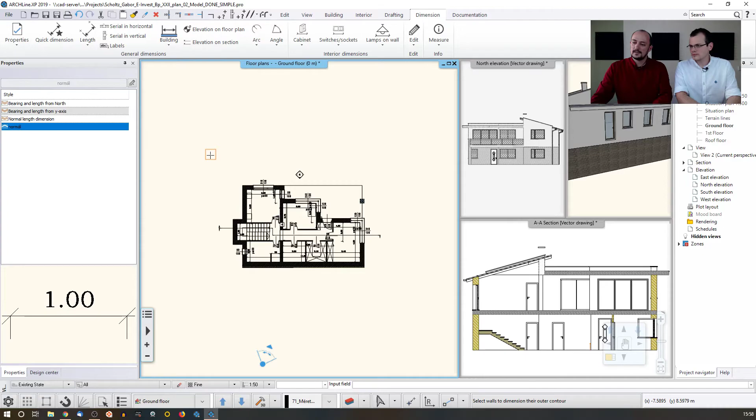There is actually one setting which summarizes the whole building, and that's also something I have selected here. I select the whole building, click enter, and then place it around, and the software automatically dimensions that. This will follow the changes, and the same happens with the doors and windows.

So now if I would like to print this, I would always recommend creating a plot layout. Prepare the plot layout, even if it's only an A4 size, you can select that paper. I will go with an A2, for example, with landscape. You can also add your plot stamp - this will be this one in this specific case.

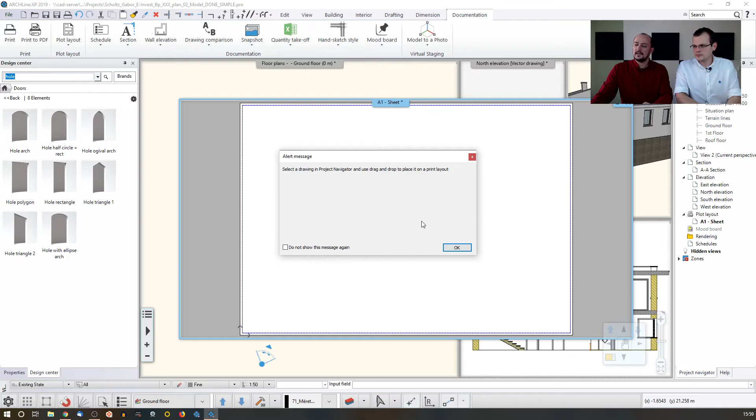And then the software will create a new sheet, and here you can actually fill up the details. You can bring in the project details, which are again BIM data that you can add to your project. Data that was already filled, the software automatically fills up - you don't even need to push any button, it's automatically read. This information was actually read from the file, BIM and project parameters.

This is something that appears whenever you create a new project. You can see that the plot stamp is automatically filled up. So this is already filled up.

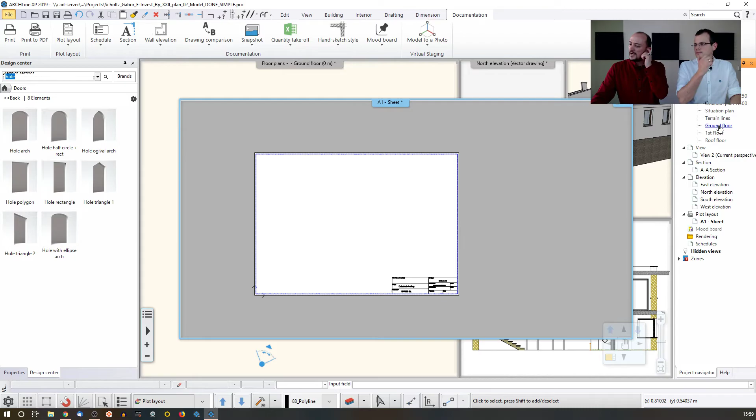To put the content here and be able to print it into a PDF file, for example, all you need to do is find the proper drawing. Like in my case, this should be the ground floor, so I just click and drag, and select the scaling - let's go with 1:100. Let's just place it here.

And let's go with another drawing - let's select the first floor as well. Let's place it 1:100 again, and this goes here.

And then if I would like to add a smaller detail here, I can go to the floor plan, find the proper place, and in the plot layout, copy part of a plot layout. So I'm not just taking a whole drawing, but instead taking one part of it - let's say you want to have a few rooms, this one for example, on this specific part for any sort of reason.

And then I click here, and when I zoom in - I mean move back to the drawing sheet - I go to the plot layout and I just paste this part to the plot layout.

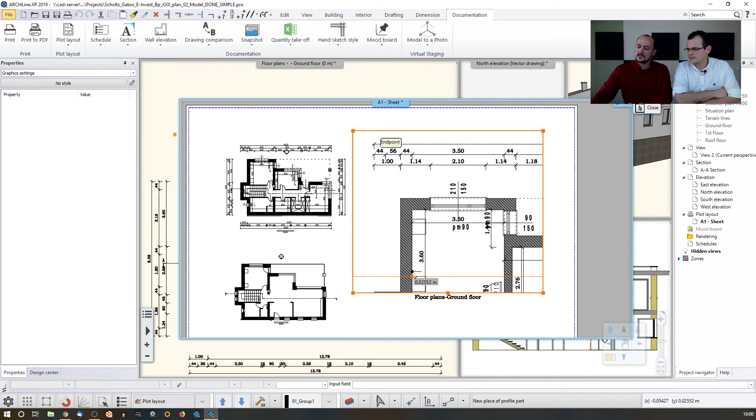I would like to paste it, so I just go to paste to plot layout. This is again something that I can select, so let's just go with 1:25. I believe it would fit large enough nicely. Whatever you have placed here, you can select later on, change the content, make it larger or smaller.

This title automatically appears, which you can change here. And this is actually not just the title; it renames the drawing as well. If you click here, the drawing can be renamed. I just made a typo here, for example. I say okay, floor plan, and then it renames it here, so I can see.

How do you print this, into a PDF for instance? So into a PDF, if I would like to publish it, I just click on the print to PDF option, and now the dialog appears automatically. Here in this dialog, I can set up the PDF format. In some countries, it's important that you can create a level B or level A PDF archive. Now I just go with the regular one, and I select the file.

This should be something - let me just save it on your desktop. This will be the floor plan of this building, and click on create. Now I cannot see any content, or whenever I see it, it's actually very small, because it's already scaled down.

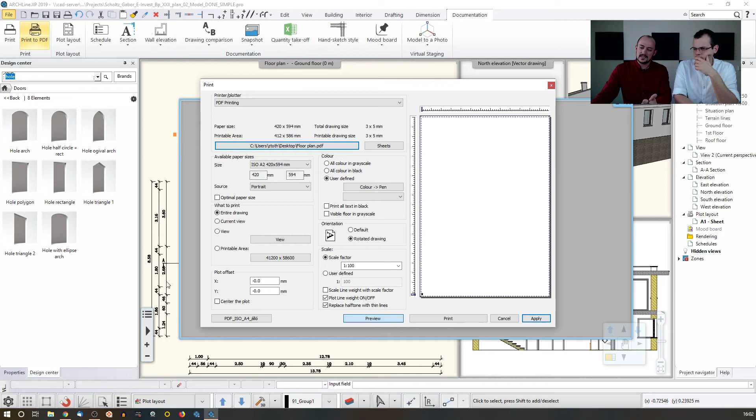The reason for that is that the paper size is not correct here. Let me just go back. I think it was A2, and the sizing is not correct because I already sized this. This is already 1:1, so I just go to 1:1, and then it appears correctly. Yes, that's so let's just go with this one.

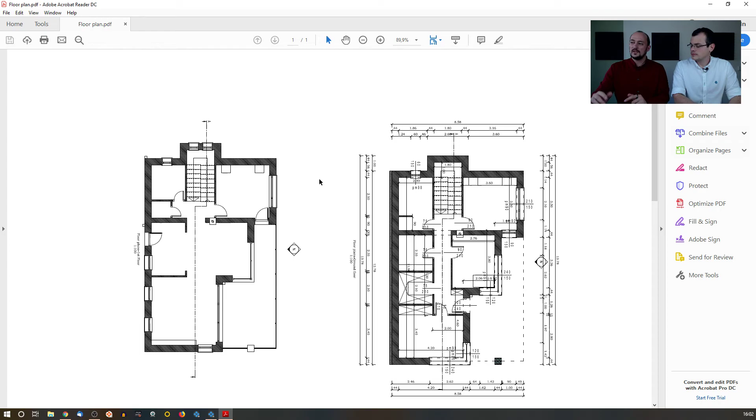Let's print it, and then if you have a PDF reader installed, it automatically appears. It appeared on our other screen, but now I am bringing it back. So this is how it goes. We will later talk about how you can create multi-page PDFs and things like that, and what other things become necessary when you are willing to make details and documentation. But this is actually the whole thing, how it covers the whole workflow.

And actually, just a final touch - if I load the final version of this project, this was it. And then I will just quickly show you how to make a render, because I think this way the whole story is whole. Yes, because we are aiming at something like this - this is the outcome that we want to achieve. So now what I have here is not finished yet, so this will be just a draft.

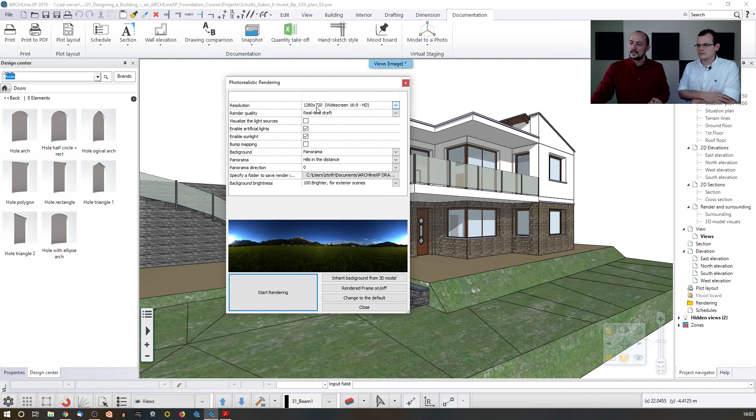Whenever you select the 3D and you set up a representation of that, let me just go like this. Let me just enlarge that. And then when you click here, you will be able to create a rendering. I will just go with the draft, so it will be really fast and not the final quality. But I just set up the resolution, what sort of lights I would like to see with what sort of background.

Perhaps. And then when I click on rendering, the software will digest the content, and then it will very quickly realize a visual, which I can see. Because I just go with real-time rendering, I can zoom in, make adjustments, make changes here, and whenever I do that, the software will reflect those changes - it automatically tracks the changes. When I change the settings of the materials, this is also very useful, and then at the end, of course, I can save this as an image file.

So I think now the story is whole. Perfect. So that we just wanted to give you a taste of what ARCHLine has to offer, but obviously we are going to keep on doing this for the next 4 shows.

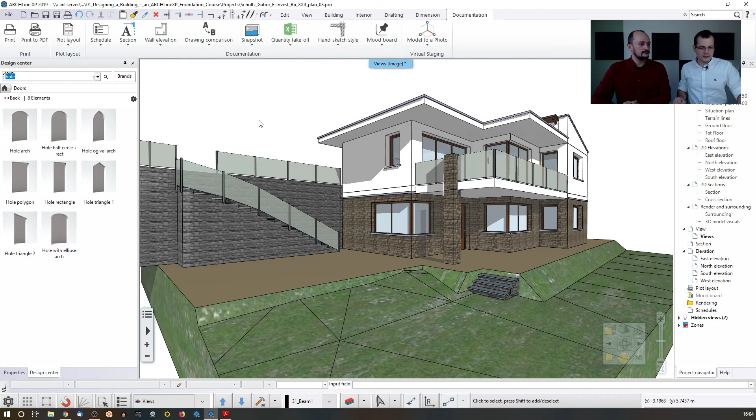We are going to keep on talking about the design stages that we are going to discuss. And that takes us to what we are going to talk about next, not next week, but the week after - using architectural data, because you need to know how you can use existing data. They could be drawings, BIM files, or files generated with another software product, objects that you have already created, drawings that you created in another software. You need to know how all this comes together and how you can create something like the project that we just created. And this all goes into collaboration, how to use data which is already there.